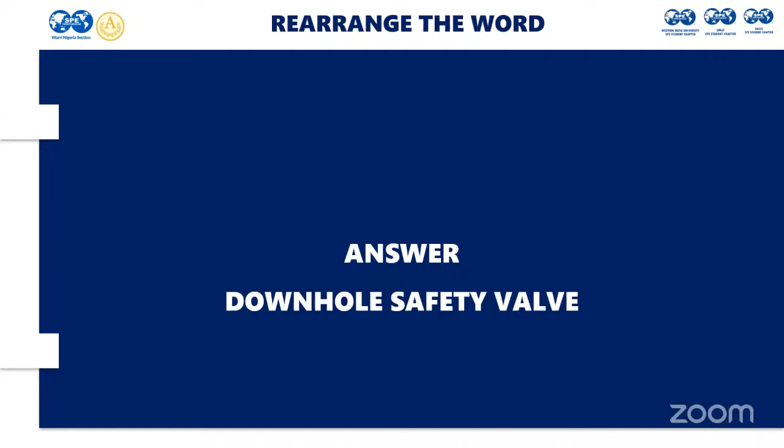Oh, this seems very tricky. Let's see who is coming. Amos is saying Christmas tree. Adoma: Christmas tree. Cliff: Christmas tree. Seems to be obvious, huh? Myself, I really don't know, but we really have brilliant people on this call. Great. Christmas tree indeed. So, again, please tell us who won for this. Mr. Amos Akpoduma. Amos, thank you. Congratulations.

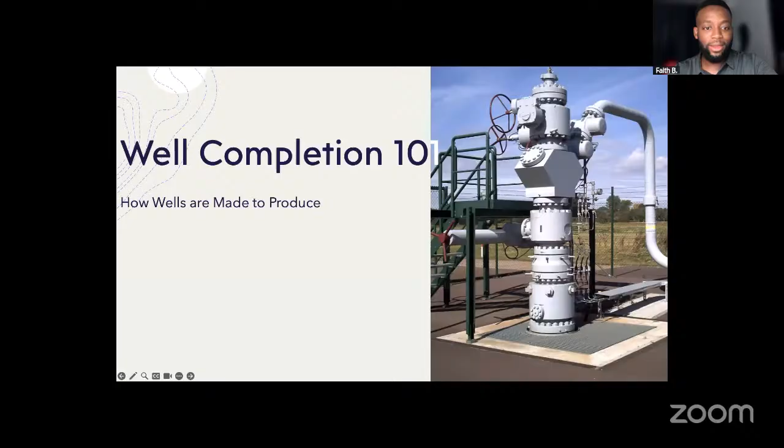So the topic for this evening is well completion 101. I called it 101 because we are going to be looking at the basics of well completion. When you hear well completion, you should be able to break it down to its simplest terms. Engineer Chris already gave an overview of what we're going to be discussing this evening, and it really did justice to that. For our agenda, we'll be looking at the life cycle of a well, what is well completion, completion environment and constraints, completion types, main completion components, the workflow of completion to production, why completion matters, then key takeaways, and finally time for question and answers.

For the life cycle of a well, basically when you hear about oil and gas wells, before it comes into actualization, it has gone through a couple of phases. The major phases are what we see on the screen: the planning phase, the drilling phase, the completion phase, which we're going to be talking about, then the production phase, and during the life of the well you want to do some intervention, and at the end of the life cycle you want to abandon the well.

So what we will be dwelling mostly on today is completion. Before you can complete a well, you have to drill it. You have to punch a hole in the ground to the desired depth to access the hydrocarbons that are deep down in the subsurface. But before all of this starts, the design phase, the planning stage is very important, because whatever you put in your plan is what you want to work with to actualize the objective of the well.

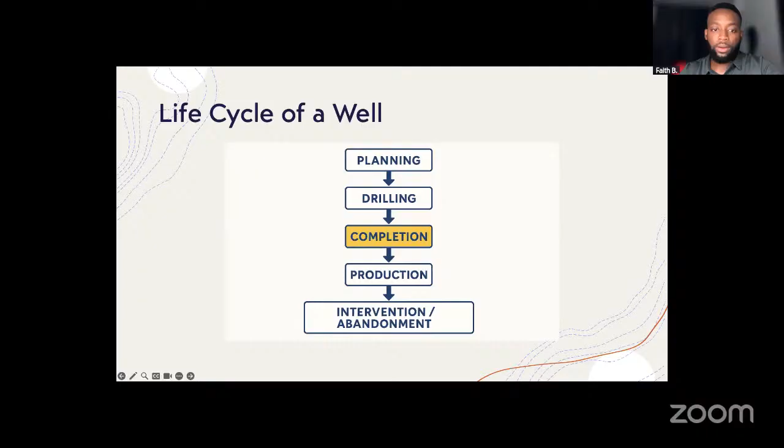So what is well completion? In its basic terms, well completion just represents an interface between your reservoir and the surface production facility. When I say reservoir, I refer to that substructure down in the earth's crust, thousands of feet in the subsurface, that contains the hydrocarbon, either gas or oil. There are some specific properties that make a particular rock a reservoir. I don't want to delve into that, but once you hear reservoir in oil and gas, what comes to mind is that subsurface storage tank where you have the accumulation of oil and gas.

The surface production facility just refers to the several components and equipment that work together in tandem to process the oil and gas that you have produced from the well. So everything installed to allow hydrocarbons to flow safely and efficiently from the reservoir to the surface is what we call well completion. It involves the design, the selection, and installation of tubulars, tools and equipment located in the wellbore for the purpose of conveying, pumping, and controlling the production or injection fluid.

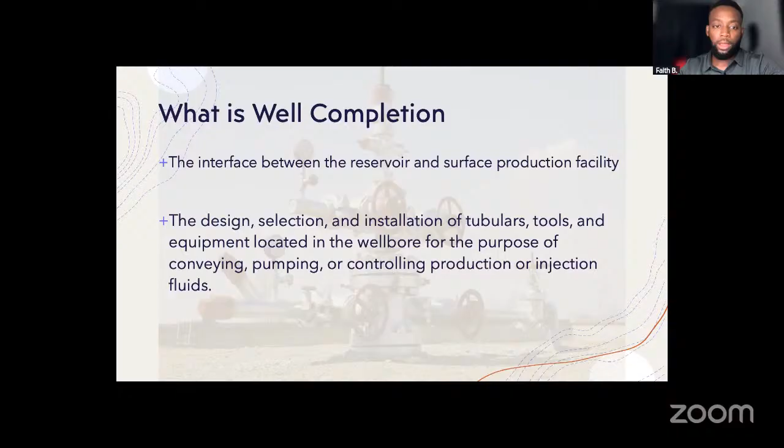Then what well completion is not: it's important to know that well completion is not reservoir engineering. Reservoir engineering focuses on understanding and managing the oil and gas reserves that you have in the formation. With reservoir engineering, you are able to determine the volume of what you have there, how you can safely produce it, and how you want to extend the life of the reservoir. That's what reservoir engineering deals with.

Drilling mechanics just involves the engineering and physics applications involved in drilling the oil well itself. And facility design, like I mentioned earlier, are the equipment you have on surface to process your oil and gas into finished products. So well completion is none of these things. Let's not confuse them.

So the importance of well completions include providing a flow path for production or injection. Like I said, you either want to flow the fluid from the subsurface to surface, or you want to pump certain fluid from surface into the subsurface.

An example of injection is gas injection or water injection. What water injection or gas injection means is that the reservoir is not able to produce all the fluids that are in it, so you want to assist the reservoir by pumping some fluids from another well just to sweep what you have there to surface. That's what injection basically means.

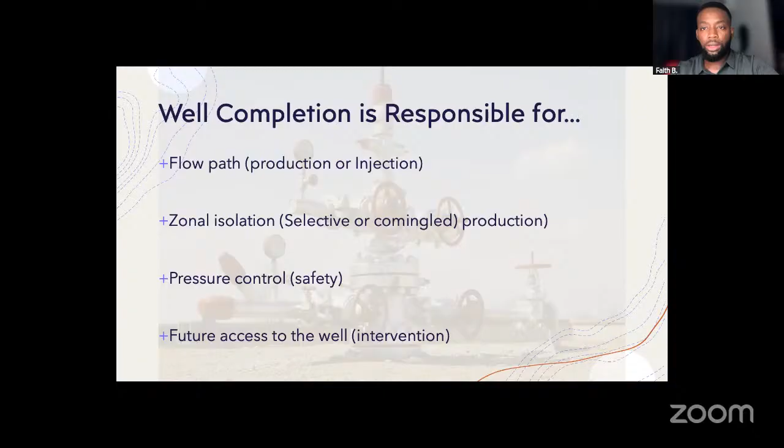And well completion would also provide future access to the well. Say the well is not producing as you expect, you want to do some form of intervention—well completion provides you the conduit, the access into the well, to ensure that the well is producing optimally. So we look at the completion environments and some constraints involved in well completion.

It's important to know that there are different environments for oil and gas wells. You have land locations, which is basically onshore. You have deep water, swamp locations, and shallow waters. For these different locations, the type of completion design that you do would differ from each other. For deep water, you want to do a type of completion that would minimize intervention in the future, because deep water operations are very expensive.

So the first thing we're going to look at is high pressure, high temperature. When we talk about high pressure, high temperature, you are looking at pressure regimes over 10,000 psi and temperatures over 300 degrees Fahrenheit—those are high temperature zones. So the type of materials you're going to use in that well is going to be different from a well whose pressure regime is less than 5,000 psi.

And I mentioned deep water already—deep water refers to water depths greater than 1,500 feet. In such environments you have hydrate formation risks, you want to limit intervention access, and it also involves complex subsea equipment.

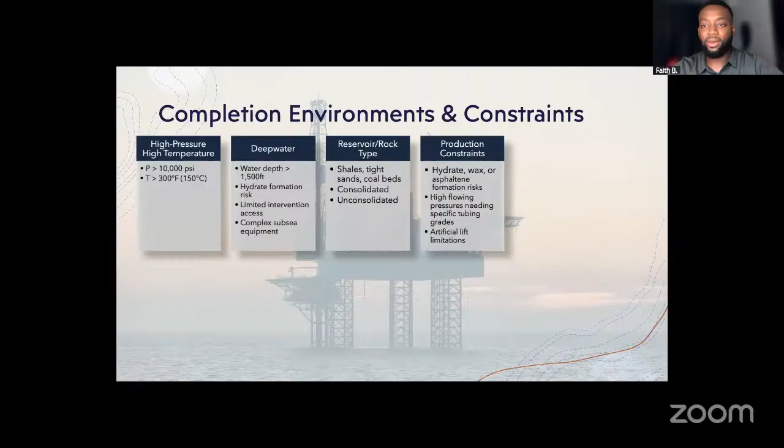Then for production constraints, there's risk of hydrate formation, wax formations for oil wells. You have high flowing pressures that you want to use specific tubing grades for. Artificial lift methods is also another limitation for well completion—I would explain what artificial lift means in the next couple of slides. And for well orientation, a well can be vertical, 0 to 5 degrees.

It could be deviated, 5 to 60 degrees, highly deviated wells, and you have horizontal wells that are 80 to 90 degrees and above. Mechanical constraint has to do with the tubulars, the metallurgy of the equipment that you have in the wellbore.

When well completion is being planned, you want to design the well in a cost-efficient manner without compromising the quality. So you have cases whereby you need to consider your cost, you need to do some trade-offs just to achieve the objective of the well.

For safety, you want to ensure that the equipment you are installing in the well can manage the pressure regime that you have in the well. And also for sour service, sour service refers to when you have hydrogen sulfide as one of the components of your wellbore fluid. When you have it in large quantity, it can damage your production, your completion system. So you want to choose equipment and materials that are fit for the conditions of the well.

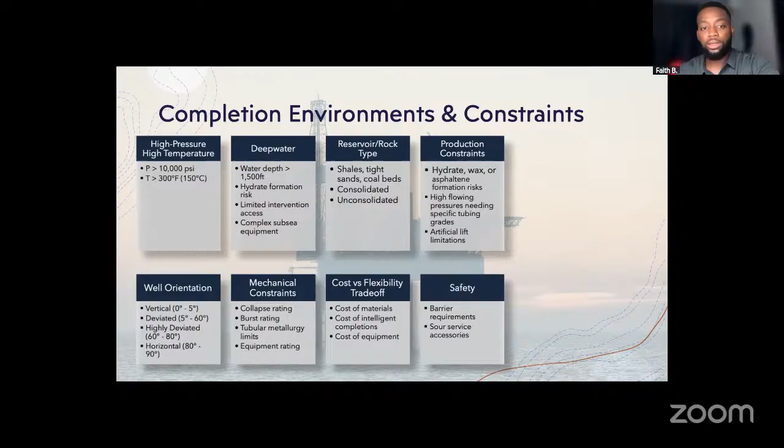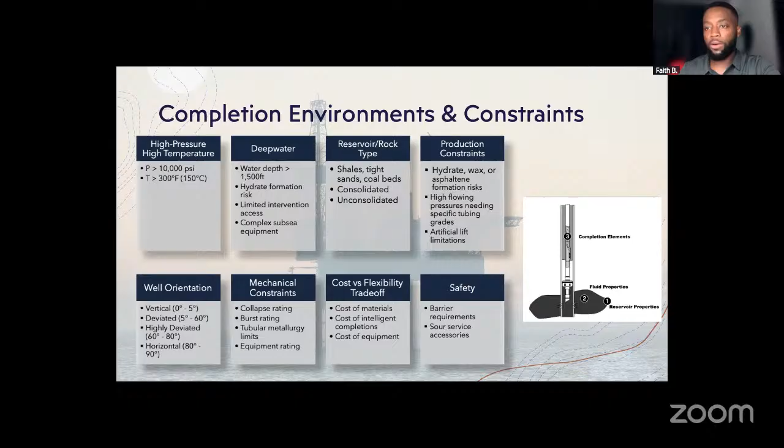So basically, everything I've said is summarized into three: the reservoir properties, which has to do with the pressure and temperature, and then the fluid properties, which has to do with the content of your reservoir fluid, and then the completion elements, which is basically the quality of the equipment that you decide to put in the well.

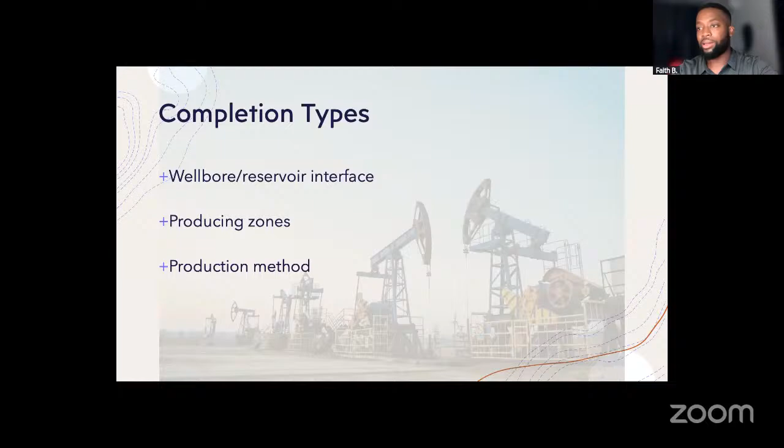For completion types, we can define them in three categories: wellbore and reservoir interface, producing zones, and production method. When we talk about wellbore reservoir interface, it's talking about how you access the reservoir. Remember, I said the reservoir is just like that storage tank that contains the oil and gas you want to access in the subsurface. So the way you access the reservoir is basically what we are talking about here.

There are different types, even more than this, but I've limited it to five. You have barefoot. Barefoot means you drill into the reservoir and you leave it like that. You don't run any protection casing into the reservoir. You just want to flow the reservoir fluids as it is.

This is usually common for consolidated formation. When I say consolidated, I mean that the reservoir rock is very coherent. It doesn't break or dissolve into sand while you are flowing the wells. So it's consolidated, and this is usually applicable for wells that are over 10,000 feet. To give a perspective, an average adult has a foot length of 1 foot, so you can picture how deep 10,000 feet is.

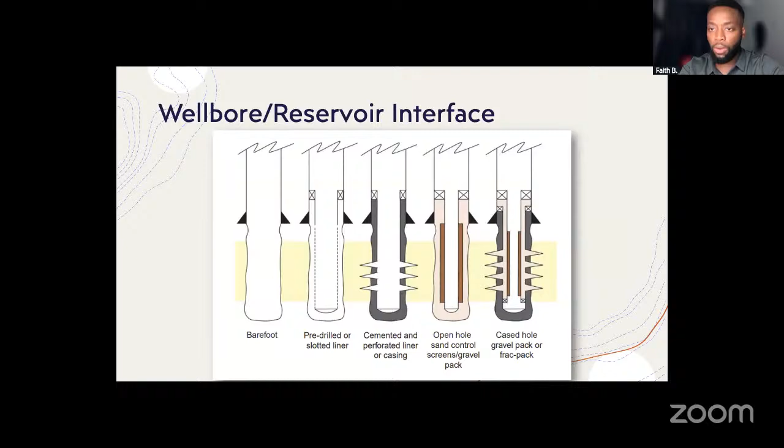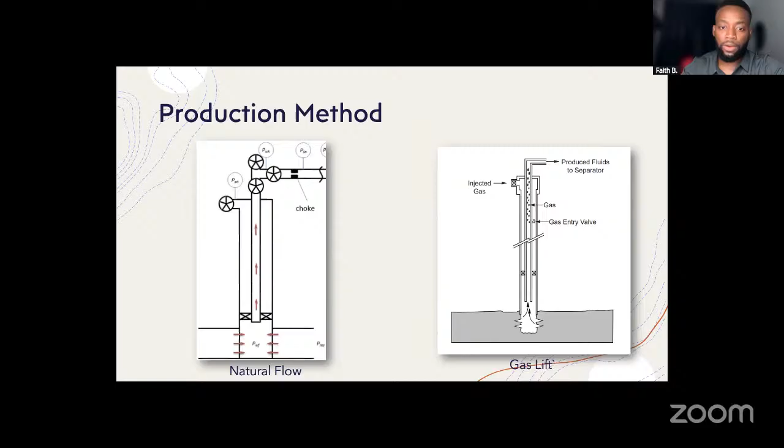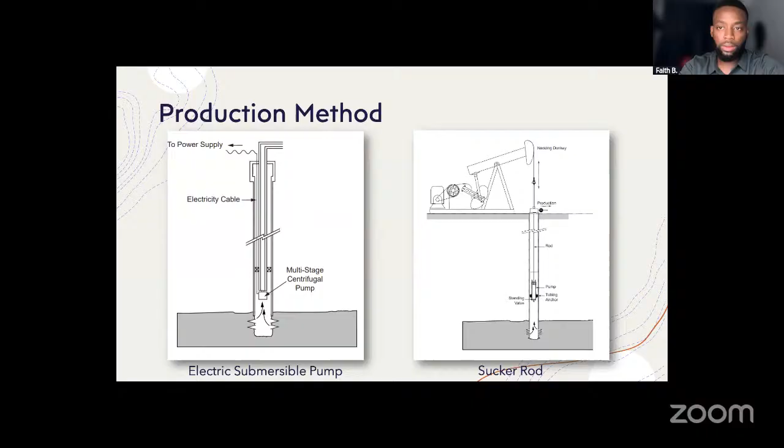So to do a recap, the wellbore reservoir interface refers to lower completion because that's the part that interacts with your reservoir. And the part that interacts with the space above the reservoir, we call it upper completion. That consists of your tubings, your gas lift system, electric submersible pump. So when you hear lower and upper completions, it refers to the well completion types. There are some wells that require you to just have upper completion equipment, and some that require both lower and upper completion equipment. All right, we'll look at some main completion components, the most common and most important ones.

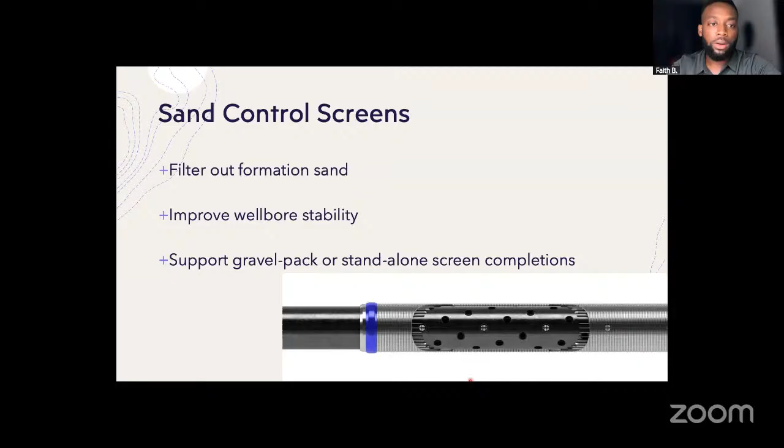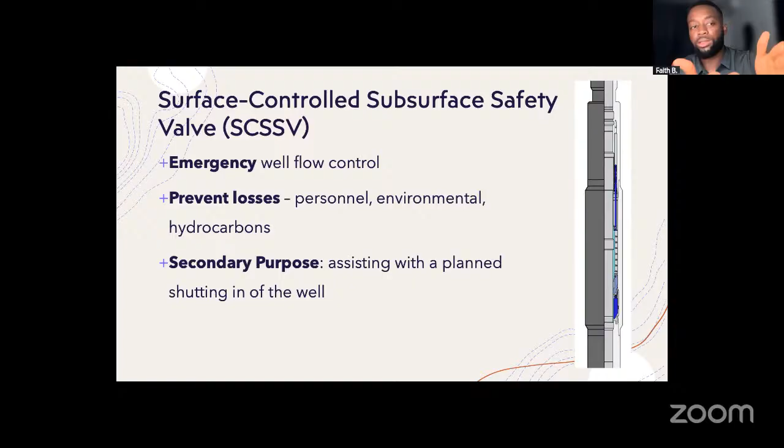Okay, another component that is very vital is the surface controlled subsurface safety valve. We call it safety valve for short, SCSSV, and it has three major functions. Emergency well flow control when there is need to shut down the well, maybe due to damage to surface facility. You don't want spillage of oil and gas to surface, so you trip off the safety valve and it closes. With that, you prevent loss to personnel, to the environment, and you don't just spill hydrocarbon to surface. The secondary purpose is to assist with the planned shutting in of the well - you don't want production, so you would have closed your valves on surface, then you close this safety valve that is downhole. So that's just the basic function of the safety valve.

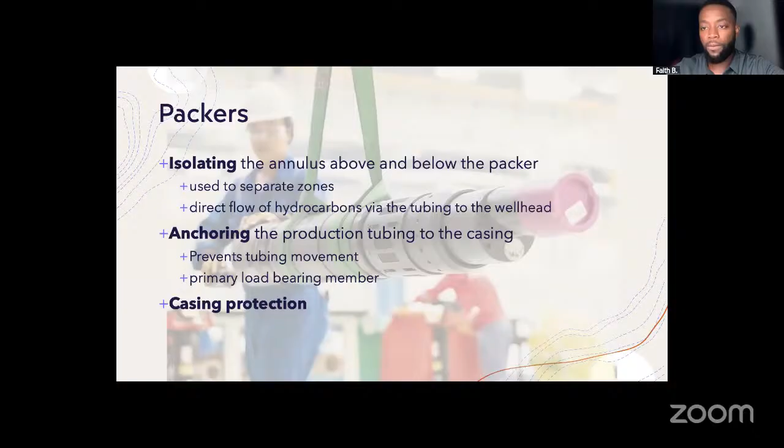Another key component is packers. Packers are very, very vital in your completion. The major function is that it helps you isolate the annulus above and below the packer. Remember when I mentioned the multiple zone production system - you need packers to be able to achieve that. The packer helps you isolate one zone from another so that both would not communicate, and it also provides anchorage for your completion equipment. All the equipment we're going to talk about, the packer provides anchorage for them. It also provides casing protection. Your casing, if you are familiar with water wells in Nigeria, is similar to the rings or plastic pipe that you run in your water borehole. That is what casing is in oil and gas. So it protects the upper annulus of the casing, that is the part above it. Reservoir fluids can be corrosive and can cause damage, and casing is not something you can replace easily. The moment your casing is compromised, you have to do remedial work - casing patch, squeeze cementing - to fix it. You don't want to go through all that stress, so you put a packer to help protect that annular space above your producing zone. This is a picture of what a type of packer looks like. There are different types of packers - this is just one of them.

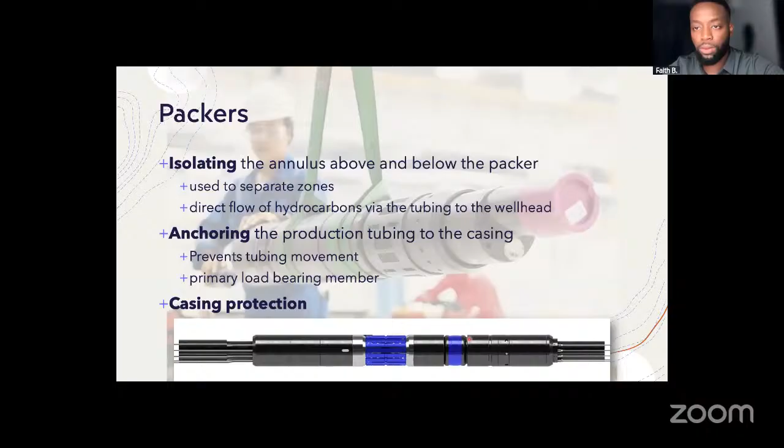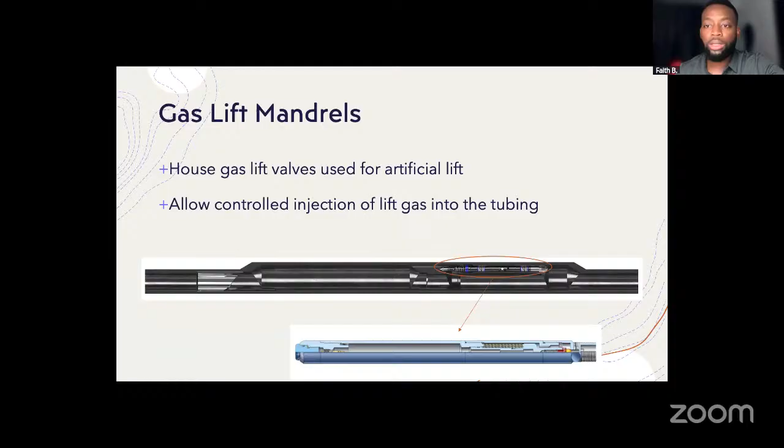And gas lift mandrels - like I mentioned earlier, you need gas lift mandrels to carry out gas lift as an artificial lift method. This gas lift mandrel basically provides a means for you to install your gas lift valves. They have these pockets on their sides where you install the gas lift valve that will allow you to inject gas into the tubing to assist your oil to flow to surface.

Another component is sliding sleeve, also known by the brand name sliding side door, or SSD. Basically, you have a flow path, but there's a sleeve on the inside that can shift up or shift down to open. What it basically does is allow production of fluid from the space outside the tubing into the tubing, providing a flow path between your tubing and annulus.

There are other functions too. You can make use of it in multiple zone completion systems, and you can use it to drain a tubing. Let's say it's time to abandon the well and you have fluids filled up in the tubing. You can open the SSD because it's at a deeper depth, shift it open, and drain the tubing. That's another function of the sliding sleeve.

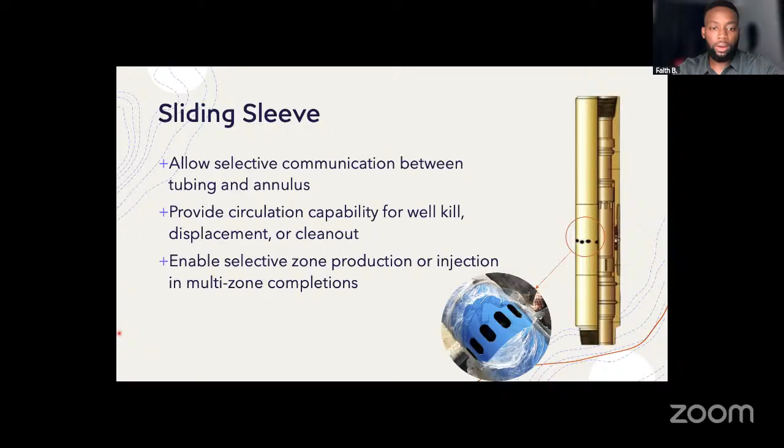Another item we have here is the landing nipple. The landing nipple provides an interface to receive devices like plugs, memory gauges, or chokes. Basically, it has a recess, like a lock, that receives a lock.

Let's say you don't want fluid flow from your wellbore for some reason, or you are done producing a lower zone and want to produce an upper zone. You run in a plug, and the plug sits in the nipple profile and prevents flow of fluid from the reservoir to surface.

You can also use it for memory gauges. You run memory gauges there to record pressure and temperature of the wellbore over a particular period of time.

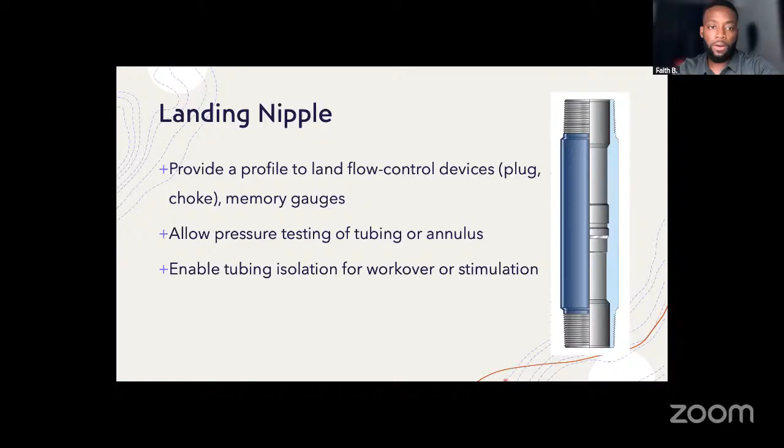Another vital equipment is the permanent downhole gauge. It's basically an electric device that helps you monitor your wellbore. You want to record the pressure and temperature of the well over its life, so you make use of the permanent downhole gauge. But you don't just run the permanent downhole gauge alone, you run it on what we call a solid gauge mandrel.

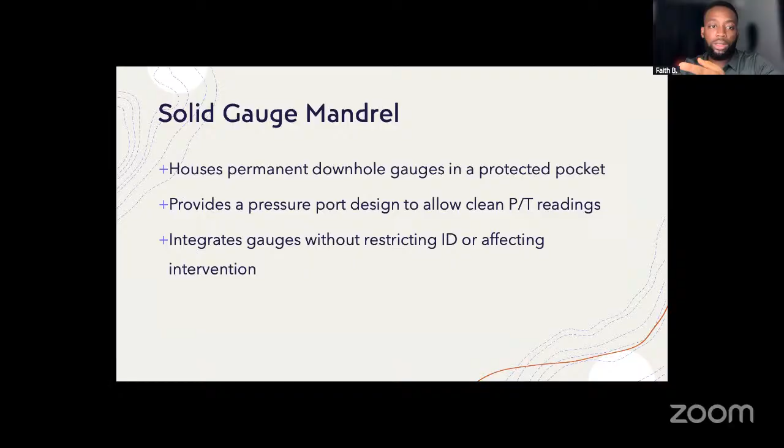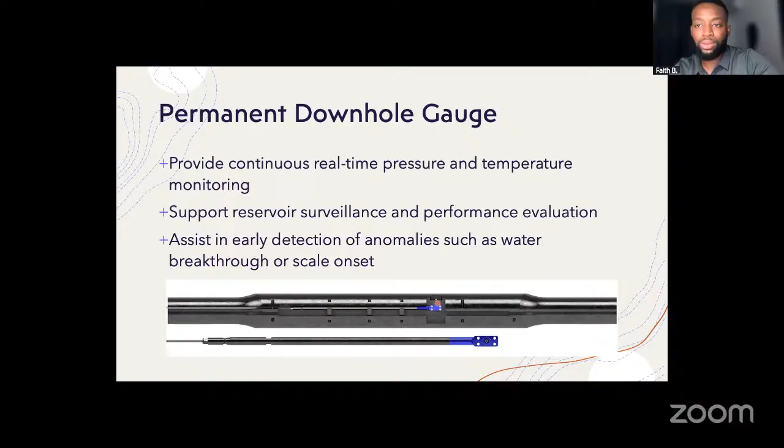The solid gauge mandrel has a pocket. It's shown on this other slide - this is the solid gauge mandrel, and this is the gauge. You can see the gauge installed on the solid gauge mandrel, which serves as a carrier for the gauge. With the data you get from the wellbore, you are able to predict the behavior of your well over time.

Another piece of equipment is the wireline re-entry guide. It's usually at the tail end of the completion. There's an aspect of well operations that requires you to run some tools into your tubing, so in any event where you run equipment past the tailpipe of your tubing, you want to provide a means for that equipment to come back up when you are pulling it out.

The shape of the wireline re-entry guide is designed so it's beveled on both the inside and outside, so that if your tool gets to hang over the edge, it can slide in. If you had a 90-degree edge instead, you wouldn't be able to pull out the tool, but because the interface is beveled, you are able to pull it out and it easily slides off the tailpipe. As I said, the wireline re-entry guide is usually at the tail end of your completion string.

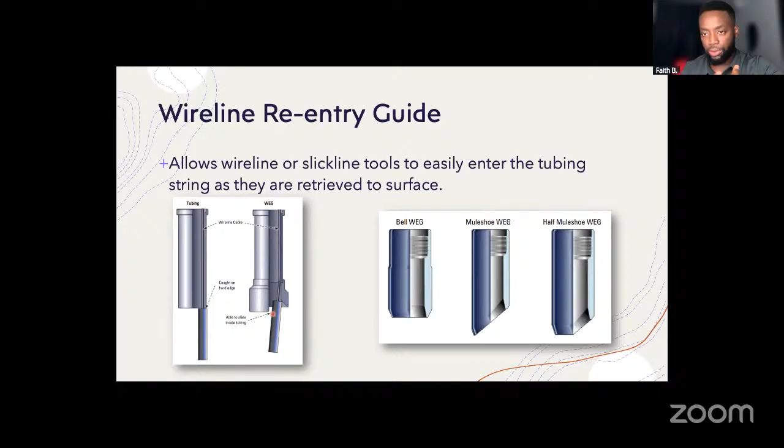We cannot talk about well completion equipment without talking about tubings, because the tubings make up 90% of your entire completion string. All the equipment we've mentioned earlier will be made up to the production tubing, and it serves as a conduit for your production fluid from the reservoir to surface - just like the water pipe in your house that conducts fluid to the surface.

The common outside diameters, the ODs, of these tubings include 2-3/8, 2-7/8, 3.5, and 4.5 inches. The metallurgy you choose for your completion will be determined by the fluid properties, the reservoir properties, and the temperature and pressure regime you have in the well.

You want to be able to choose something that will last, that will stand the test of time throughout the life cycle of the well. Just to give perspective, we have some wells in Nigeria that have been drilled and producing as far back as 1968, 1970s, and they are still producing up to now. It tells you that the quality of materials installed in those wells back then are still functioning and in good condition.

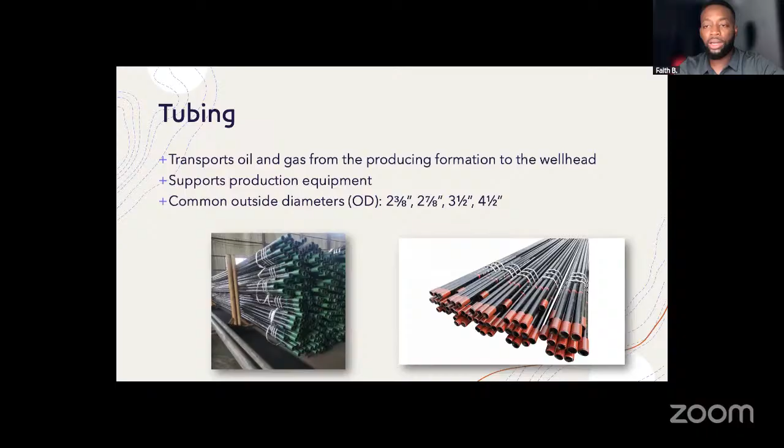When you go to fields familiar to many persons, like Heritage or Emeteti locations, or any NPDC locations, you know that most of these wells are old wells and they are still producing. The final component we'll be talking about is the Christmas tree.

It's funny that it's called Christmas tree, right? But this name has been adopted as far back as maybe 50, 70 years ago. What the Christmas tree basically does is that at the end of deploying the completion string, you want to be able to direct and control your fluid flow from surface. This Christmas tree consists of several valves and chokes on both sides, up and above, ascending, and that's why it's called Christmas tree. You have a lot of valves and fittings that resemble the shape of a decorated pine tree.

So it houses chokes and valves for pressure and rate control. It serves as an interface between your wellbore and the production facility. And when it's time to access the well for intervention, it also provides a means of doing that safely.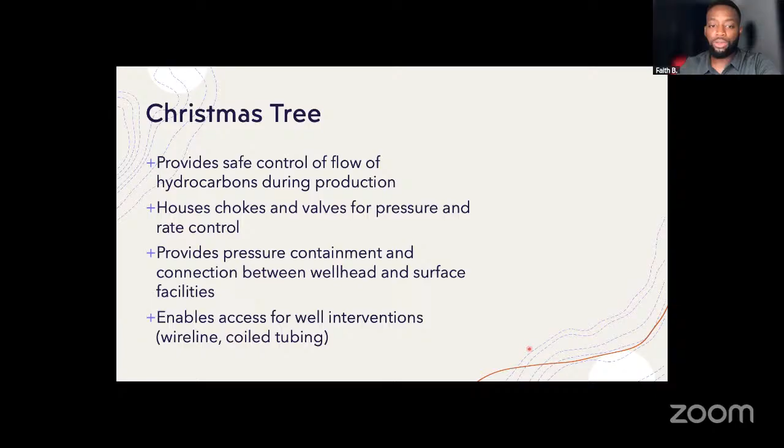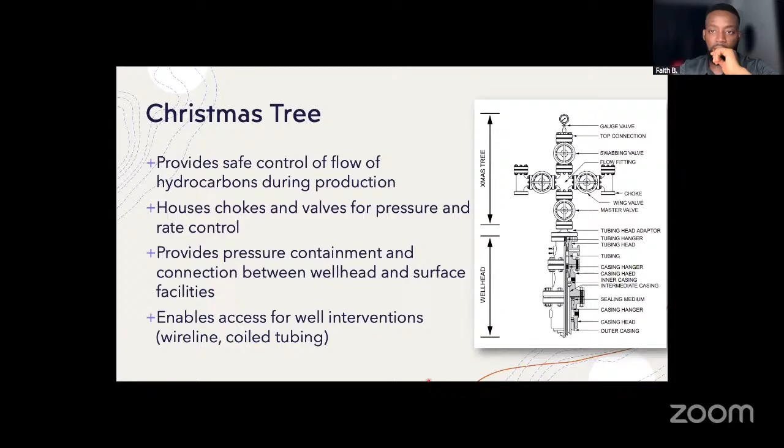So this is what a typical Christmas tree looks like. The Christmas tree is above the well head. The well head is on its own, then the components that you have above the well head is the Christmas tree. This is just a simplified diagram of the Christmas tree. There are much more different designs, a lot of designs, right? And like I said, this is a visualization of

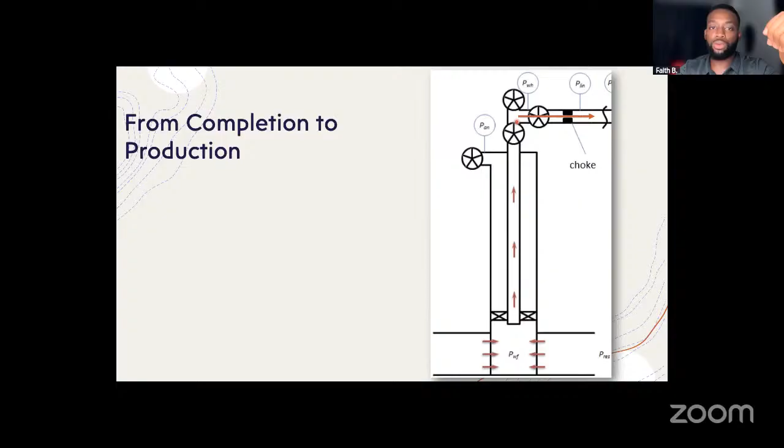what completion is to production. So by the time you have run all the wellbore components and installed the Christmas tree, you can now open up the well and flow the reservoir fluid from the reservoir into the wellbore. The packer keeps all the reservoir fluid within the wellbore interface, and then it flows through the tubing and goes to surface through your Christmas tree.

So why does completion matter? It helps you to unlock your reservoir value, that is, you are able to efficiently and safely produce your hydrocarbon to surface.

It would enhance the safety and integrity. Integrity in the sense that when you choose the right completion tools and have the right engineering designs, you are able to efficiently produce your reservoir fluid without compromising the environment, the personnel, or your surface equipment.

Then it increases asset reliability. When you have the right design in your system, you reduce failures, reduce downtime, and then you are able to produce the well throughout its life cycle.

Abi, you have your hands up. Please go ahead. Yes, sir, I just wanted to tell you, you have roughly around 2 minutes more.

Oh yeah, we are already at the end of the presentation. All right, so to wrap it up,

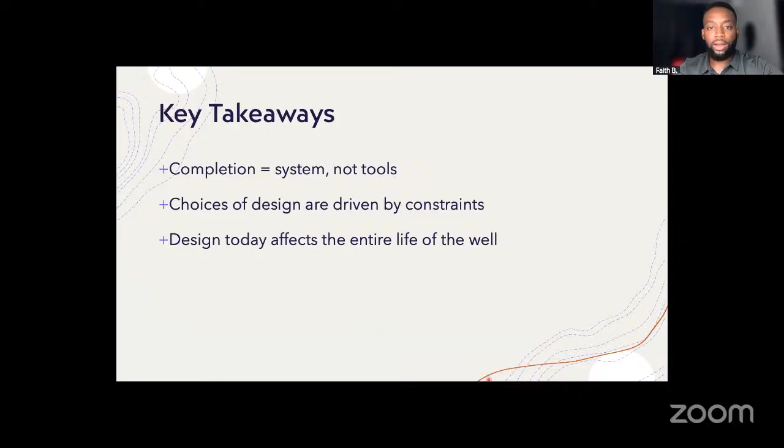So that brings us to the end of the presentation, and we'll have a question and answer section.

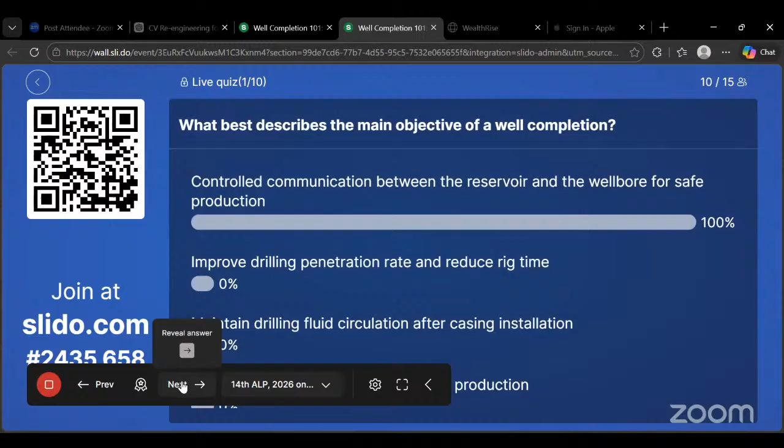Our very first question: What best describes the main objective of a well completion? First option: controlled communication. Is it improving drilling penetration rate, or maintaining drilling fluid circulation, or increase reservoir pressure? So what's the answer? All right, so 100% of participants took the first option, and yes, that's correct. What's our leaderboard like? Carl is topping, Gabriel is second, and I is third.

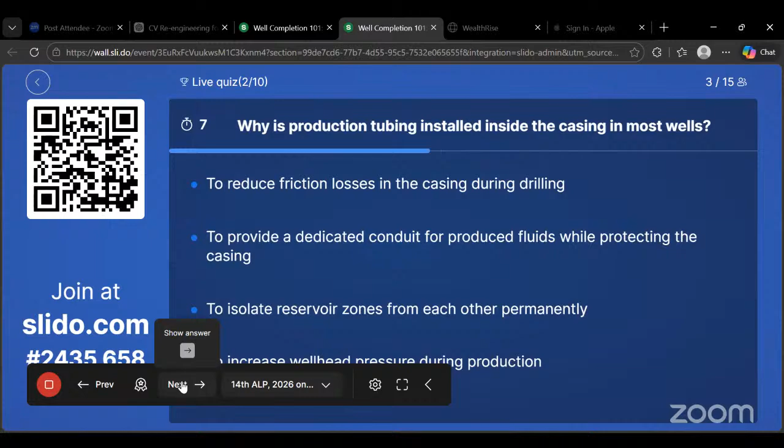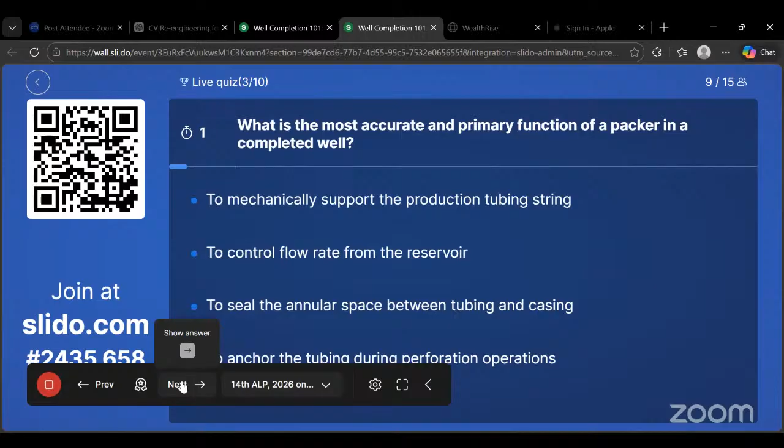Let's see our next question: what is the most accurate and primary function of a packer in a completed well? They may all seem correct, but which is the most accurate and primary function of a packer? What do we take? Our pick is option 3. Let's see, option 3 is correct. All right, so our leaderboard has been displaced, we have Your Daddy coming into third place. Okay, let's go to the next question.

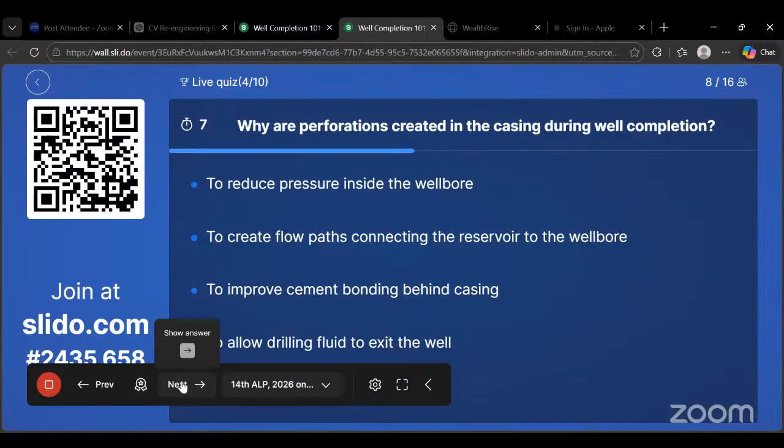Why are perforations created in the casing during well completion? I think this is a bonus question. So why are perforations created in the casing during well completion? Our answer is, so most people took option 2. And is option 2 correct? Oh yes, it is. Carl is still top, suspect, and Your Daddy following.

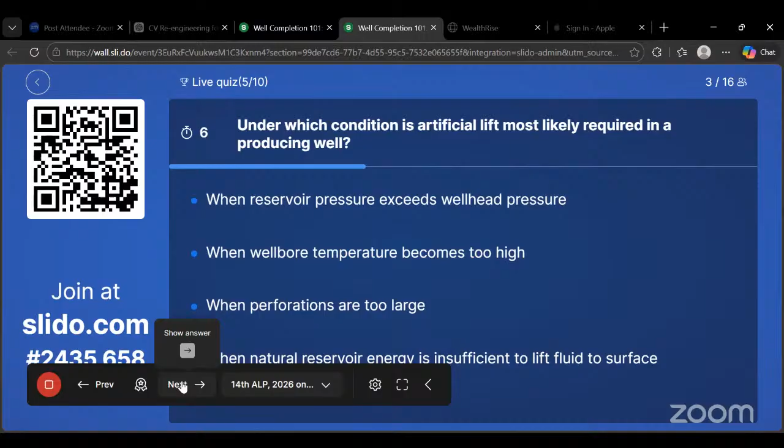Under which condition is artificial lift most likely required in a producing well? All right, I think our time is too much for the caliber of people I'm seeing here, yeah? All right, so most people went for option 4. Is it correct? Oh yes it is. Our leaderboard: suspect is coming up top, Carl second, and Your Daddy third. Speed and accuracy, thank you so much.

What's the next one? What is the primary reason for installing sand control systems such as gravel packs or screens? All right, I think the facilitator did justice. Yep, so let's see, what's the answer?

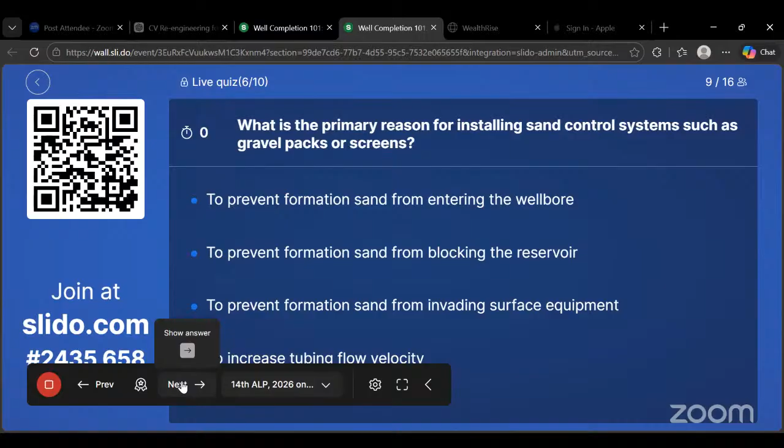Most people went for option A. Is that correct? Oh, yes it is - to prevent formation sand from entering the wellbore.

All right, suspect is up top, your daddy second, Tinubu's son third. Carl has been displaced. Oh, beautiful. Let's go to the next one.

What is the most important operational purpose of a subsurface safety valve? That's your SCSSV or down-hole valve. Is it to regulate production flow rate, automatically isolate the wellbore in event of emergency, or isolate the wellbore in abnormal pressure conditions? What do you say?

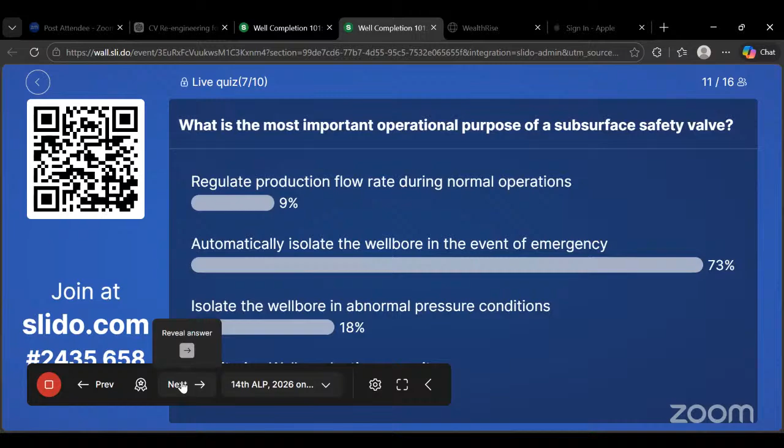Most people went for option 2. Are you correct? Oh, yes it is. Okay, what's the leaderboard like? Suspect first, Tinubu son, and your daddy. Wow, Carl, where are you?

Next question: what distinguishes intelligent well completions from conventional well completions? I think our facilitator also pointed this out, right? So what's the answer?

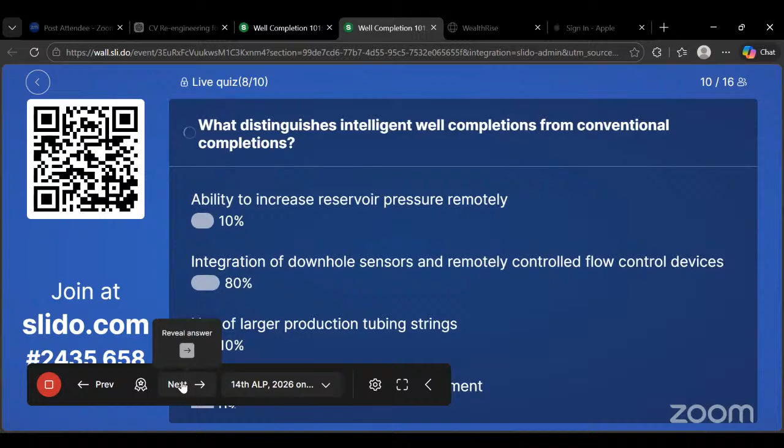Most people went for option 2. Is it correct? Oh, yes it is. Our leaderboard - interesting, right - we have your daddy second and Tinubu son third.

Speed and accuracy. Which flow meter type directly measures mass flow instead of volumetric flow? I brought this in so that we can cause a little bit of chaos. Please be able to enjoy this little pandemonium now. So what's the correct answer?

Oh yeah, many people felt this one. Our correct answer is the Coriolis meter. Thank you so much. Leaderboard: suspect first, your daddy second, and Tinubu son third. Interesting.

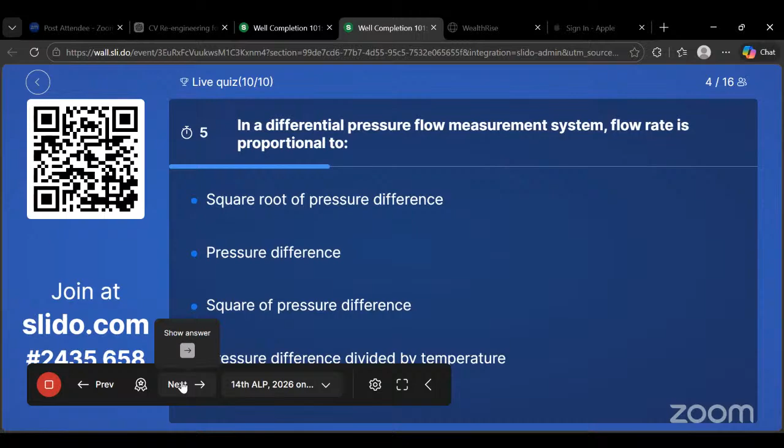In a differential pressure flow measurement system, flow rate is proportional to, according to Bernoulli's theorem, what is flow rate proportional to? This is where fluid mechanics come to play.

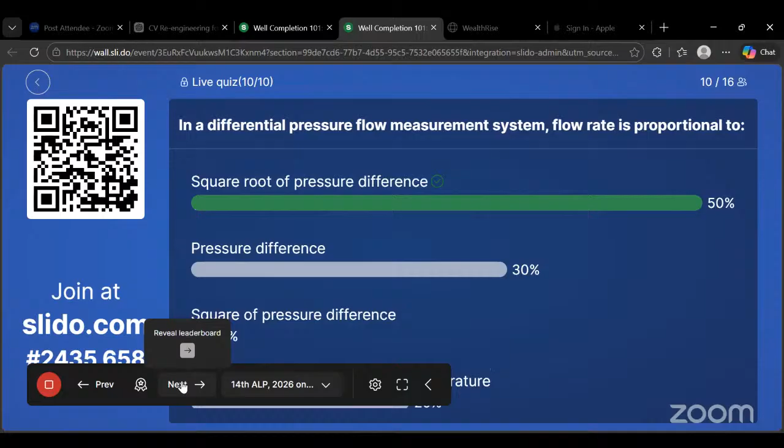All right, so interesting - square root of pressure difference, correct. Our leaderboard: your daddy finished up first, interesting. Suspects came second, and victory to Tinubu son. Wow, interesting, what a significant displacement.